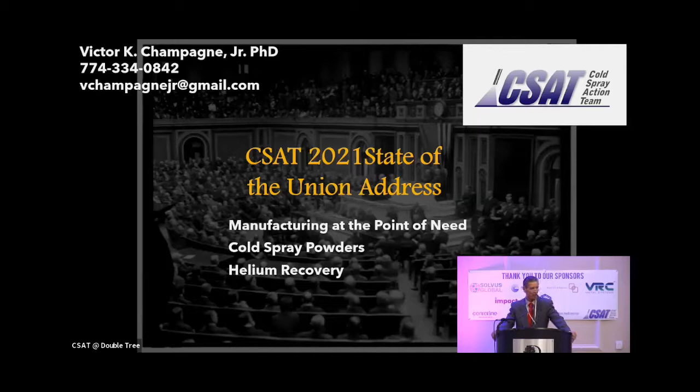Well, helium is a byproduct, so we're able to capture it in the United States, but it's still - you can view it as a finite commodity. It is expensive, 100 times more expensive than using nitrogen, but it's got big attributes, right? You get the highest velocities from using helium. So there are big efforts in trying to come up with helium-like properties using air and nitrogen, but there's helium recovery too, and I've got a few slides on that.

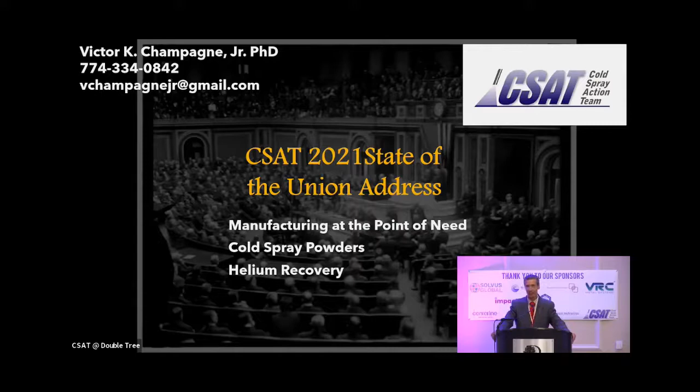So to jump right in - the Cold Spray ecosystem.

Creating that over 22 years. And I would say 90% of the people are tapped into that Cold Spray ecosystem that are sitting here today, either directly or indirectly. What is he talking about, ecosystem?

Ecosystem consists of numerous universities, national laboratories, industry players, Department of Defense, energy, other research laboratories - I still refer to it as United Technologies Research Center, so it's Raytheon Technologies Research Center. But lots of projects, programs that one year, that ecosystem sustained upwards of $120 million, okay?

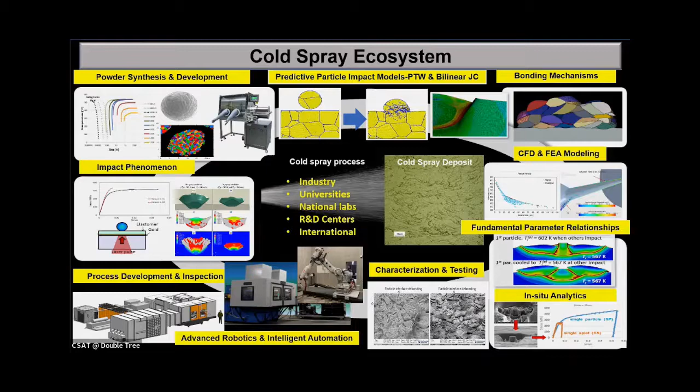And part of what you're here to do is to be networking, forming partnerships, future collaborations, taking what I say and a lot of these great speakers you're going to hear today and say, geez, wow, I didn't know you could do that. Or look at, geez, look at what they're doing here. We should be doing that. And then finding out the people to work with to make that happen.

I'm not going to go into these areas, you can read just as well as I can. But there's basic research opportunities, testing and qualification, certification, transition, implementation, development and sales of feedstock powders, of equipment, of additional hardware, software, accessories, support equipment, etc. That's the ecosystem, and it is not a closed system, it's an open system.

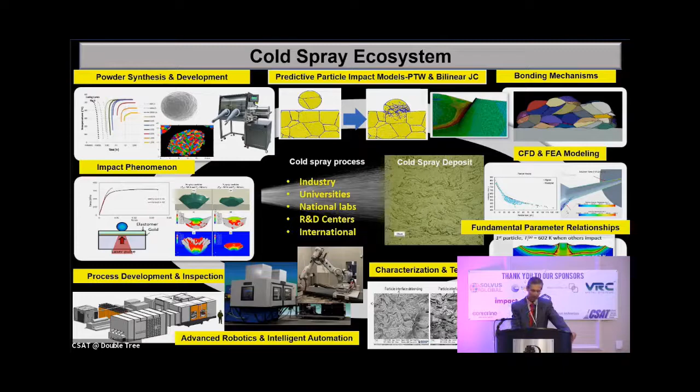We try to make it be as much open as we can. We know Cold Spray. I've developed personally with my team through the years, applications and transition into all these areas - oil and gas, automotive, especially aerospace, right? I mean, that's basically the first industry that I targeted. But there's others, including medical, antimicrobial coatings you hear.

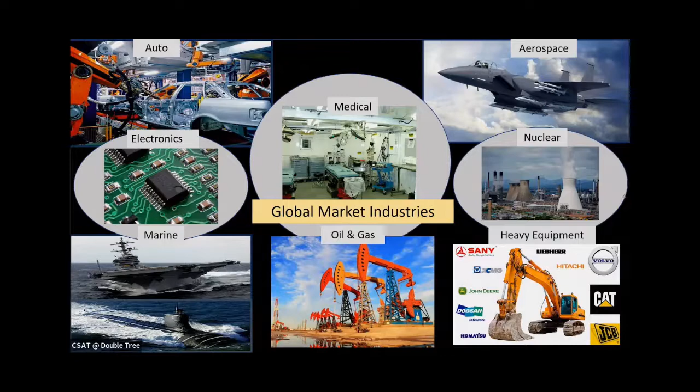And it's so funny because the work that I did with the team, geez, 2008 to 2010, published some papers, in like '12, '13, basically touting the benefits of antimicrobial coatings. So people are crawling out of the woodwork now. If they would have implemented stuff that I had said 10 years ago, we would have been much better off. So there's a lot of visionary statements that I make through the years, that other people make, presentations that you will hear today, and 5, 10 years from now, you'll be saying, geez, I heard that first at CSAT.

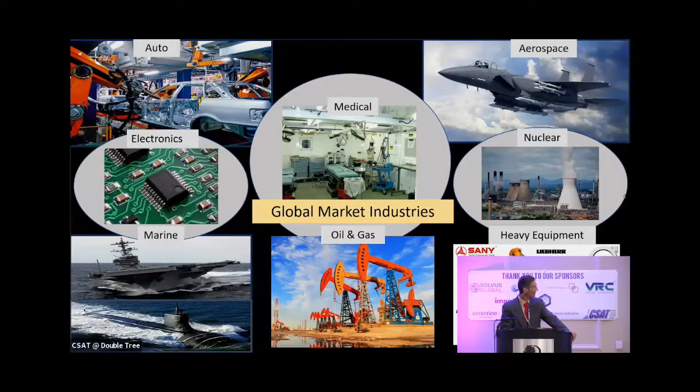And so with that, I'm going to throw up this slide. So part of what I've been doing is to substantiate some investments with folks that I work with, market studies. This just happened.

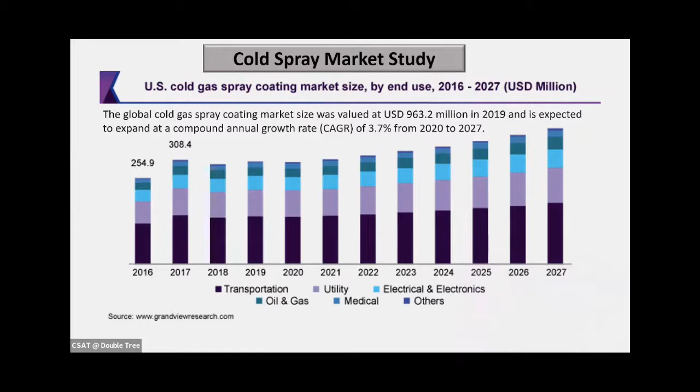You could pull this off the internet. All right, that's where I pulled it. But it shows the tremendous upward trend. And a lot of these areas, I'm looking at Aaron Nardi through the years that we've developed - we've developed and impacted a lot of these areas. So you see the significant rise.

Now, I think in dollars, we're still just shy of $1 billion, where thermal spray, I think Keith, are upwards of like $8 billion. And I firmly believe that we should be in upwards of that number. And with the advent of 3D printing, I think we should be surpassing that. I think that's what the future holds.

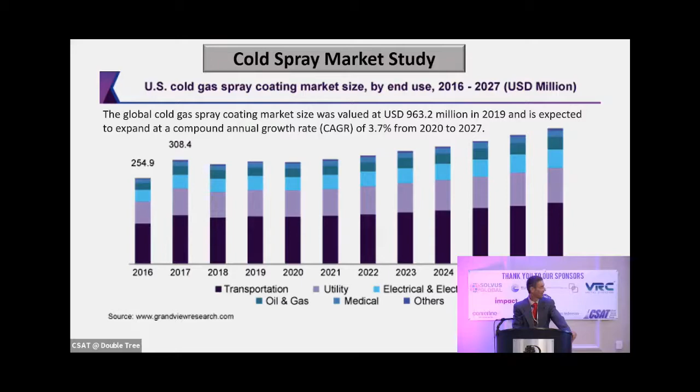And this is a directive coming from DoD on the benefits, the attributes, and the go-forward plan. We need more lethal systems powered by innovative designs, kind of a general statement. It increases materiel readiness, empowers warfighters to solve problems in the theater, right? We don't have to rely on a depot, we don't have to rely on a repair station in theater.

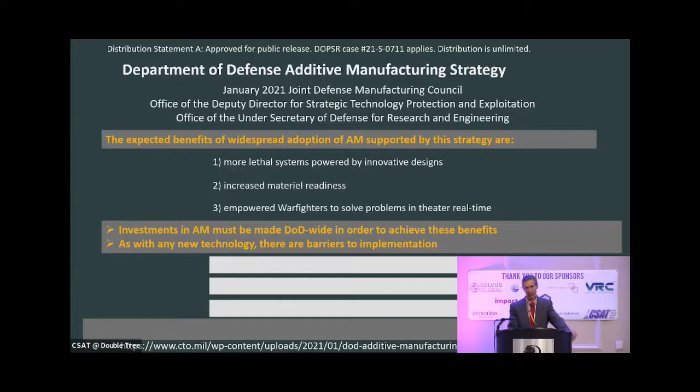But it depends on, hey, how far advanced are we? Are we mature enough? Level of expertise, training, certification. You can buy a system, doesn't mean you know how to use it, right? And then finally, data.

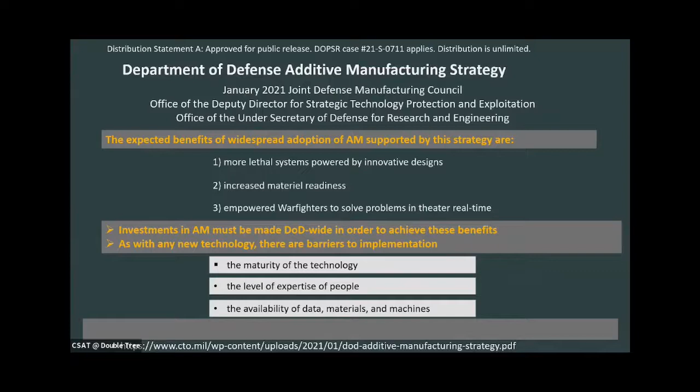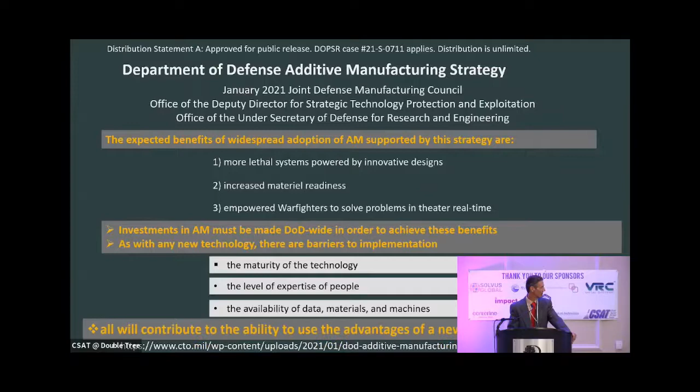When I first started the ESTCP program, which serves as the poster child for qualification of non-structural repair, is the one document right now that contains the most data on any one single material substrate combination - that's how I'll say it. And that's all going to contribute to how far we get.

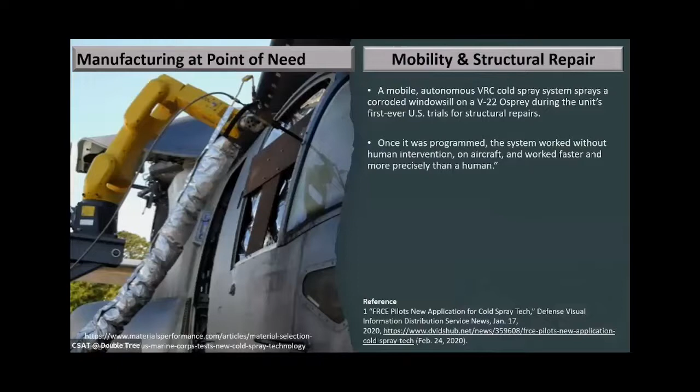All right, I'm going to show you a couple of 2-3 examples, highlights, again, over the last year or two. I wish Fred Lancaster were here, because I mean, this is where he could bathe in the limelight.

So this is a news press release on the VRC system, mobile system, repairing a windowsill area on the V-22. So it's basically a mobile system. You see, it's attached to a robot. It can be manipulated out in the theater, out on a tarmac, wherever you need.

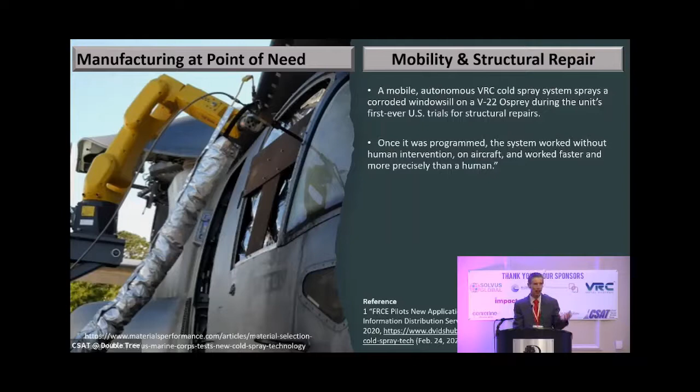And here's a quote from Fred: the future is with structural repair. And I'm going to go so far to say he's absolutely right, and go beyond that - structural repair and 3D printing.

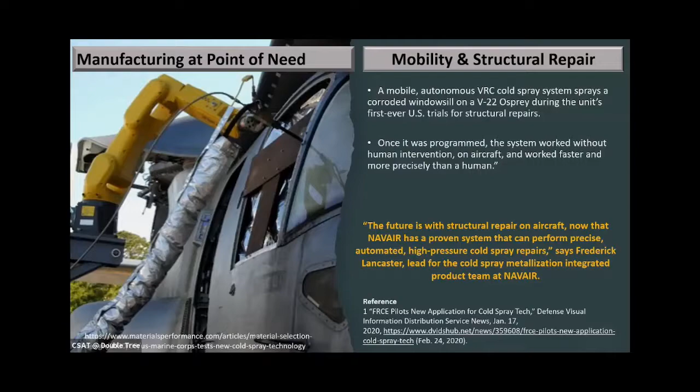I'm going to give you another example of a different system. This is amazing too.

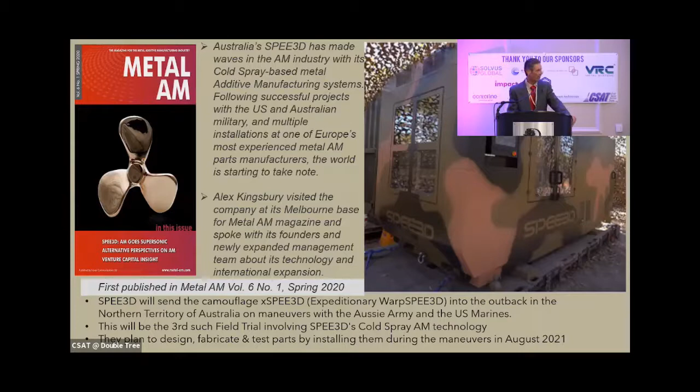I just heard that this August, the Aussies and the US Marines are going to be doing joint maneuvers out in Australia, out in the outback. They're going to be taking a number of these systems out there, and not only producing parts—they've done this 2 or 3 times together, I think this will be the 3rd time. Actually I heard about it, I'm looking at Aaron, because we had to do a tour for a general who basically said, hey, can you do this? I just came back from maneuvers with the Australians and they're doing this. So you see basically a SPEE3D unit, instead of that bright fire engine red, is camouflage, right? Because that wouldn't go over well in the theater. You'd be a target. But they're making parts, and not only that, they are going to be inserting and testing those parts in theater over, I think, a 2-week period. So that's pretty neat.

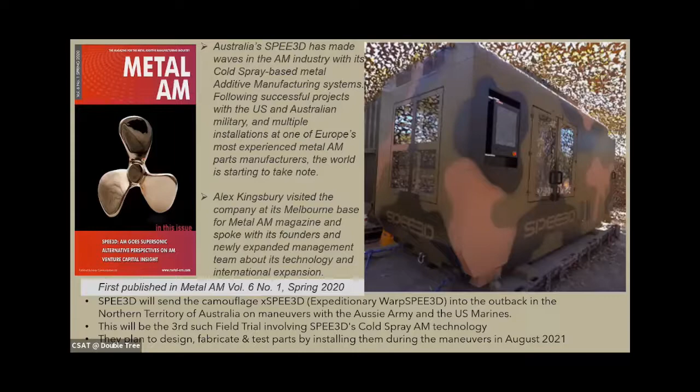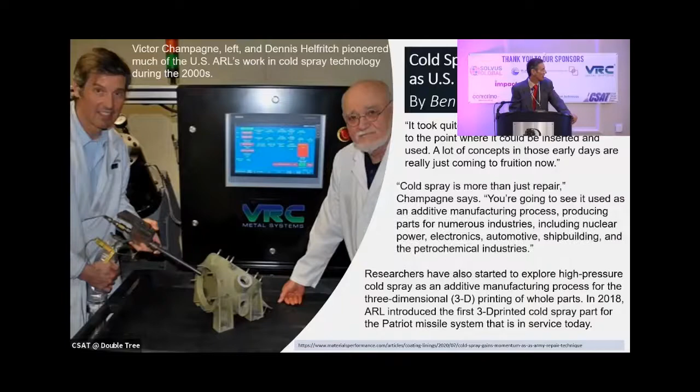All right, these 2 good-looking guys, right? This is over the last year. All right, and here's my quote—I've said this since day one. It's not just a coating technology, it's not just for repair. The future is going to be, and also in 3D printing.

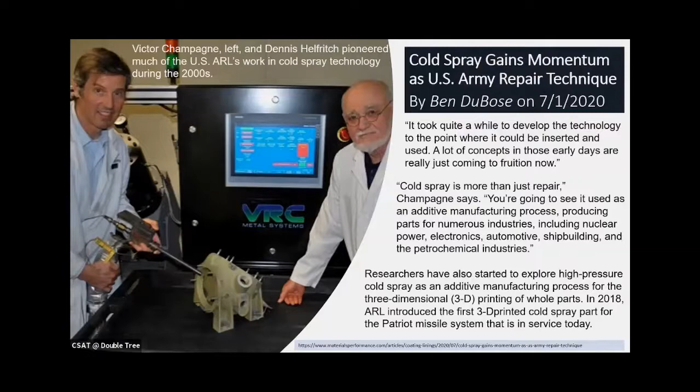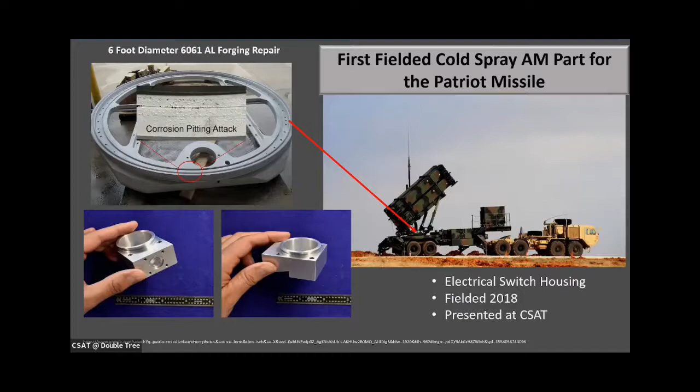So that was printed like last August, July. This thing has a delay. Here's a near net shaped part, was produced a couple years ago, 2018, introduced into the Patriot missile. The future of cold spray systems.

I just want to end with this too. At the end notes on the second day, I'm going to end and go into this in more detail. But what I see in the future perfect system—and I had said this when I was the keynote speaker at the 2007 International Cold Spray Conference, and the 2011—and I'm going to say it today in a different note: the future system, it's got to be flexible. What does he mean by that? And it's got to be adaptable.

Flexible, adaptable. I want that future system to be able to do high pressure, to be able to do low pressure, to be able to have software and hardware to do 3D printing. I want that system to be modular in concept, but at the same time be turnkey. I want that system to be able to fit through a manhole cover in a submarine, because of its modular concept, being able to be taken apart and put back together again. Or I want it in a production setting, or out in the middle of the desert, or anywhere else.

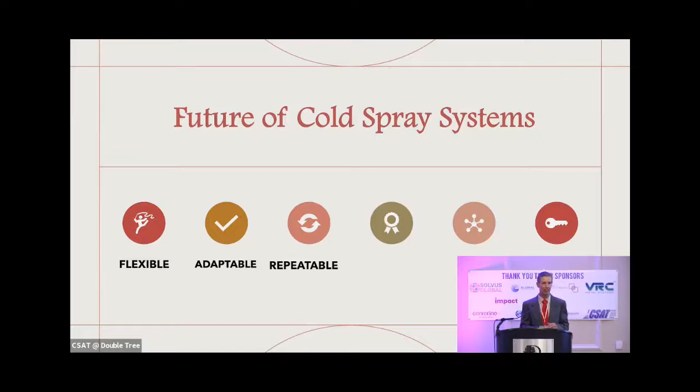I want it to be repeatable. That's not just me, all right? The whole additive manufacturing industry, it's got to be repeatable. You've got to get repeatable results. They've got to be reliable results too—am I hitting the requirements, the specifications? Got to be robust, all right? I don't want to take some laboratory system out in the middle of a desert and have it fall apart because dust infiltrated it, or take it out in Alaska and a pump freezes up because it's not made to withstand cold weather.

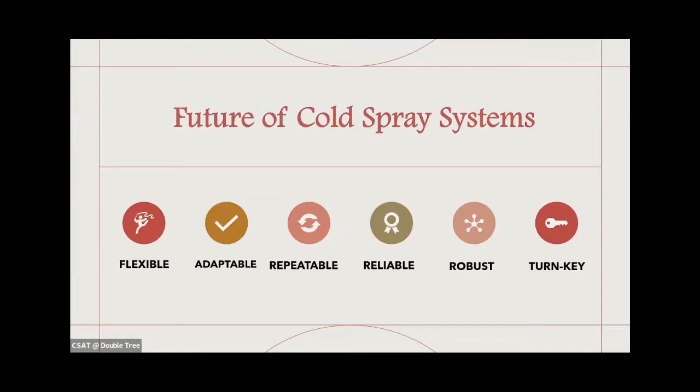And I want it turnkey. I don't want to be saying, you know, you got to buy this, you got to buy that—well, we don't do this. No, turnkey, okay.

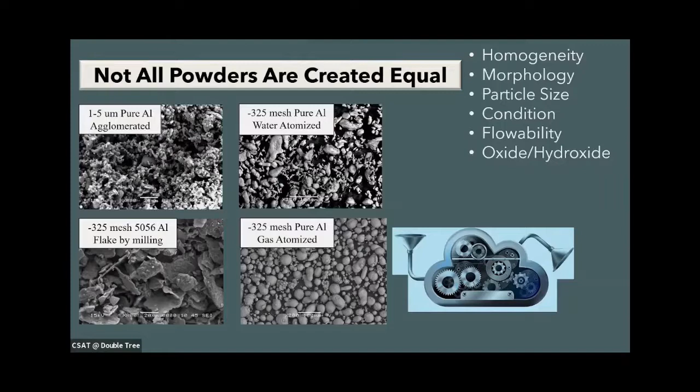Let me tell you a little story. Not all powders are created equal. I've got a lot to say and I've got to blow through these slides, but it's important. I don't want people using that argument against me by saying, oh look, you're going to buy special powders in order to use this system or that system. I don't want that—I want to be able to use off the shelf.

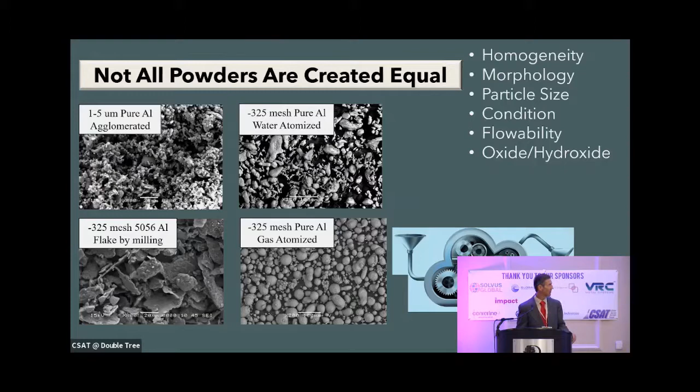Actually, I stole my own thunder, right? This thing has a delay, it's ticking me off. You have to actually press it a couple of times for it to do it once. But anyway—

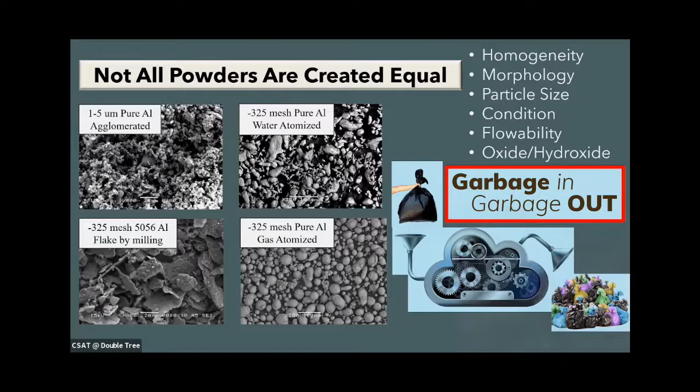This is aluminum powder, okay? So to the uneducated, I'm buying some aluminum powder, just give me the number and I'll call. You could get any one of these for aluminum powder. They all meet the chemistry, they'll all meet the past requirements for aluminum powder. I wouldn't meet it now because we've got flowability worked into the specification and other things, so you couldn't get all four of these. But a lot of people, they don't know the difference.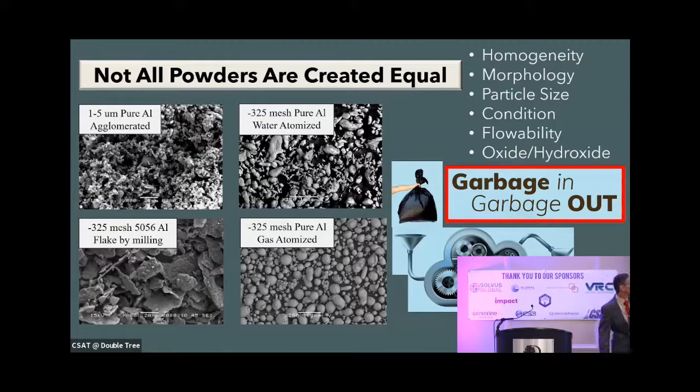Did a little experiment. A guy did his PhD thesis on this that I know. What he did is he took as-received powder and exposed it to humidity.

Oh, they can't hear me online? Okay, alright, so you got to have one of these walking things. I got a little animated here. You got to chain me to this damn thing so I can't see the slide. I wonder if this helps. No, that's worse.

So anyway, we wanted to expose it to humidity, alright? And I fought with people from DOD who told me that aluminum powder doesn't further oxidize, that once you get it in a gas atomized condition, it's not going to grow any more oxide. That's a bunch of crap, alright?

As a matter of fact, you know what they use aluminum powder for? A desiccant. What's a desiccant? Something you use to absorb water. How does it absorb water? It's a chemical reaction that takes place, and you form hydroxides. Picture yourself at Corpus Christi Army Depot in the summer.

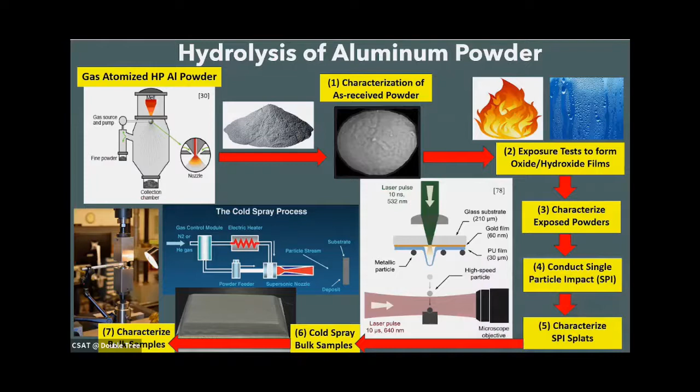You got a bucket of powder that you buy. They don't typically buy powder just for one spray trial or one spray run - no, they'll buy a bucket. They'll open that bucket up, put in what they need, and then leave the bucket open. If you're lucky, they may close it. Doesn't matter - in the experiment, we opened up the bucket, closed it, opened it up to simulate a couple, 2-3 weeks of doing that. Then we characterized those exposed powders and compared it to a baseline.

Then we did single particle impact studies to see how it would impact the critical velocity required to have the particles stick and consolidate. And then we made blocks of material and did all sorts of mechanical tests on it - we even did conductivity, hardness, UTS.

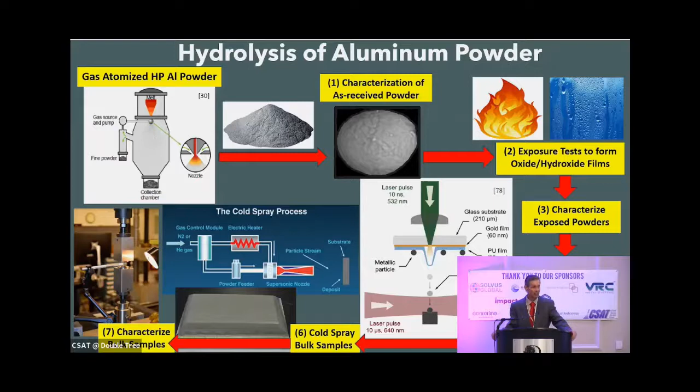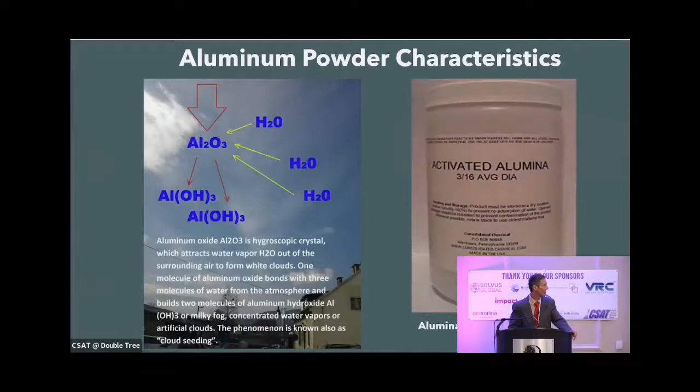And guess what? I've already said this, but I'm going to point it out again - for those that don't know, aluminum powder is a desiccant. So for people that say, well, what test did you run - you can read just as well as I did. We did everything under the sun to characterize the oxides, the hydroxides before and after. This is the most in-depth study that I've ever done, I bet anybody's ever done, that I've ever read, by far.

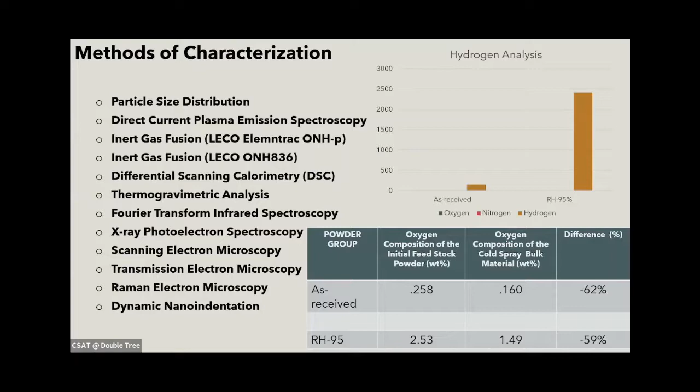Look what happened to hydrogen, look what happened to oxygen, comparing the as-received to the group that was exposed to 95% humidity. It went through the roof. You don't get hydrogen from the formation of an oxide - you get it from the formation of a hydroxide. So it hydrolyzed, that powder hydrolyzed.

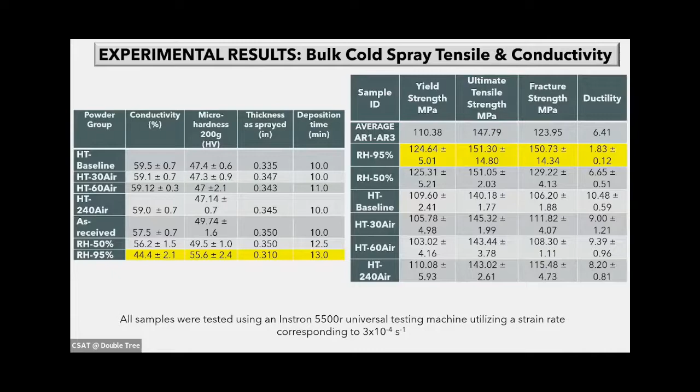I'm not going to point out all these different samples. We did experiments in heat treating the powders, and you see the differences in ductility. But the point I'm trying to make is: you open a bucket of powder, it gets exposed to humidity, it's going in the crapper pretty quick. And we've experienced that firsthand before we knew this.

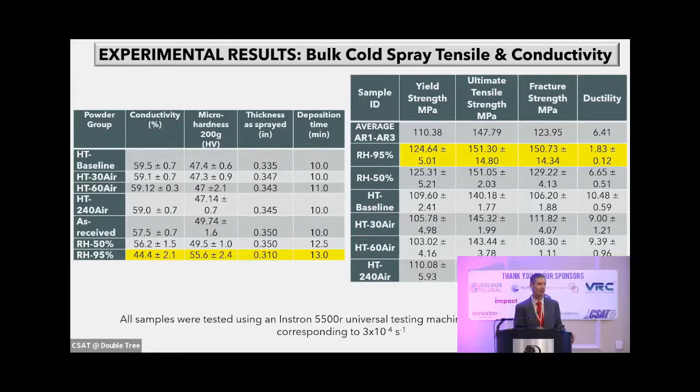We got properties in the as-received powder that were great. We sprayed it a week later and it was garbage. Whether you're doing bubblegum repairs, it doesn't matter - you're doing structural work, you're doing 3D printed parts. If you don't have specialized feedstock powders, you're asking for trouble.

Differences in fractography - I don't want to be just a talking head about programmatic stuff, I love the technical stuff. Ductile dimpled fracture in the as-received powder, versus intergranular brittle fracture in the high humidity case.

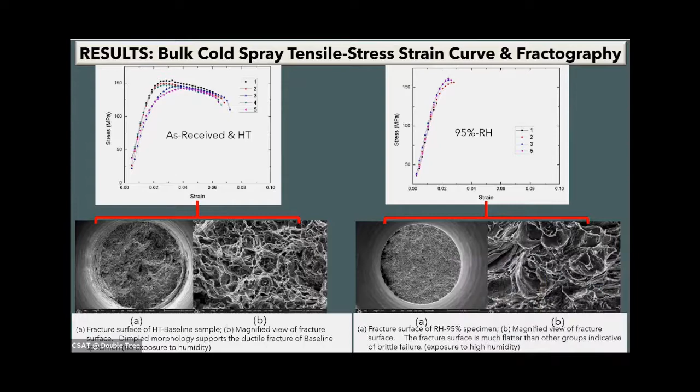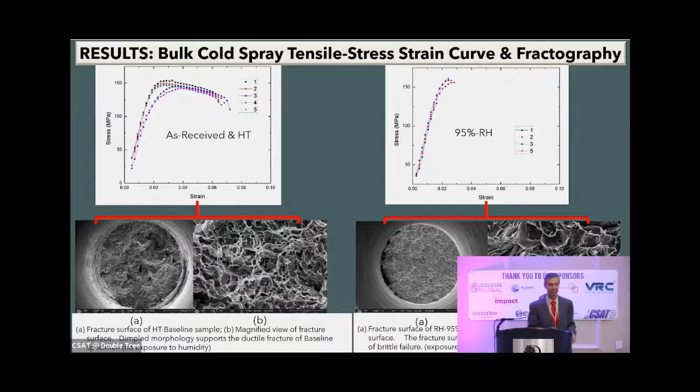So what did that mean? You got an oxide, hydroxide formed on the outside of that particle, all bombarded, formed a big block of material with a bunch of oxide in there. You pull it, it's got no ductility whatsoever, and it fractures in a brittle fashion. You want that on an aircraft? I sure as hell don't.

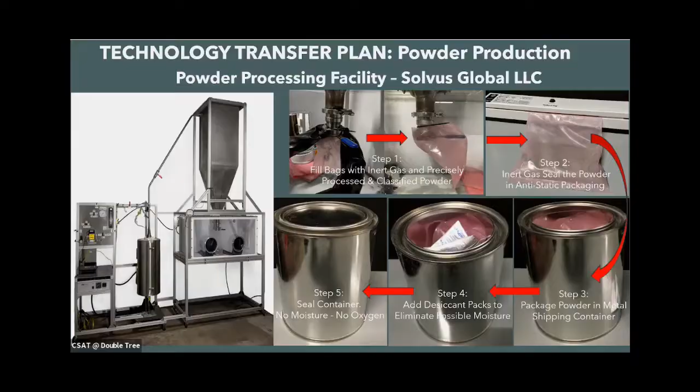This is the process that we use now. We process the powder, we have preferred geometry, and I'm not going to go into all of the different QA tests that we do, but it's flowability, it's chemistry, it's geometry, it's particle size distribution, and it's packed density.

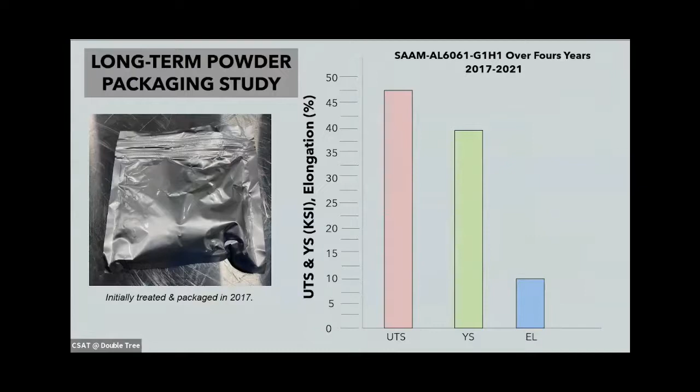This is a fascinating study, and this was part of the PhD thesis. I had data which extended to a year at the time. Now we have data that extends out since 2017 - I just did some averages and made that chart. But basically, after 4 years... think of a can of tuna.

Whether you eat it on day one or you eat it 3 or 4 years from now, you're not going to get botulism and die.

The cool thing about this is 4 years later, in that inert package, I can use the powder. So if I'm on an aircraft carrier out in the middle of the Pacific and it's humid as hell, that powder's protected in its own little cushy environment saying, I don't feel the sea mist, I'm not hydrolyzing, I'm having a great time, I'm nice and dry.

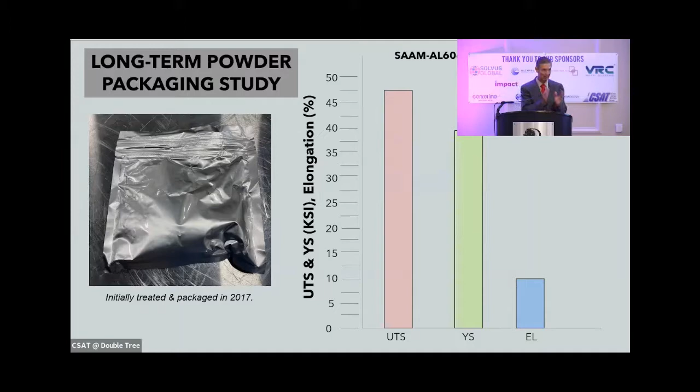And if you get inventive, which we have, you can develop a little nipple on this thing with a female and male connector to your powder feeder. So even when you put it in a powder feeder, you don't have to expose it for those few seconds or minutes, if you want to keep that level of control.

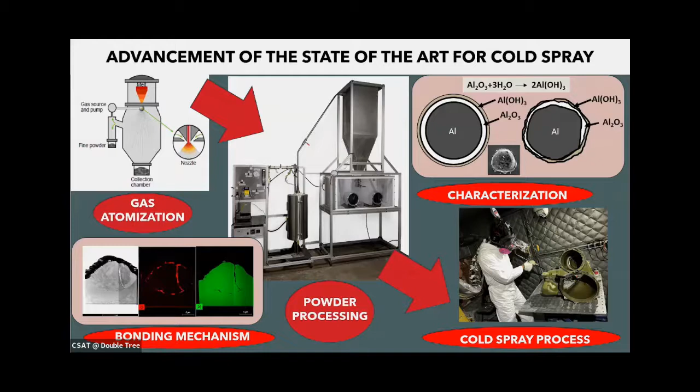I made a little cartoon. So don't think your aluminum powder has a nice little candy coating like an M&M of aluminum oxide on it when it gets hydrolyzed when you open it up at CSAT. No, it will hydrolyze immediately.

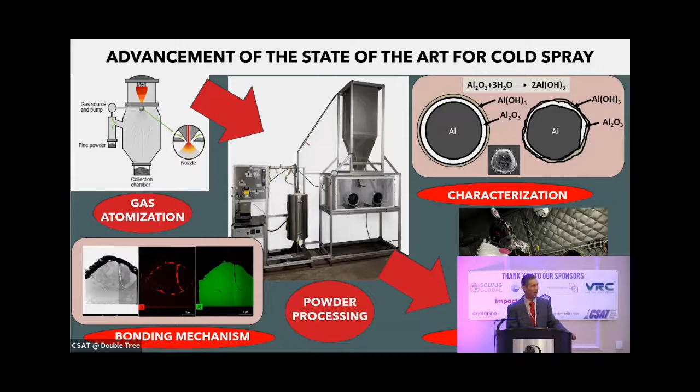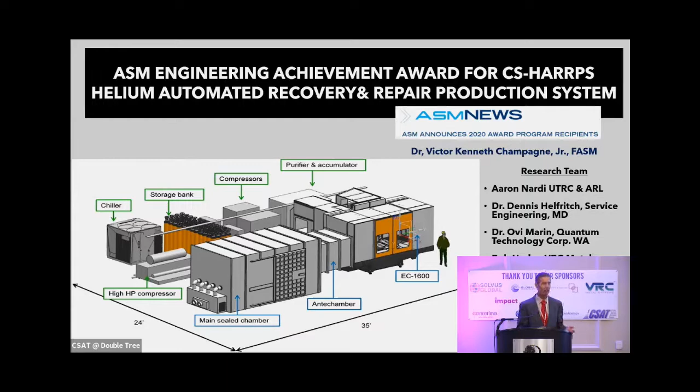I don't have time to explain the entire system. You can see me afterwards, we can discuss it afterwards. But it becomes efficient, I'll say between 20, 30, maybe 40 minutes, depending on the flow rate. So if you've got a 5-minute spray, a 10-minute spray, you're not using this system. But anything else, you do use that system. It's recovering anywhere between 94, 95%, when it's fully in operation and you've got long sprays.

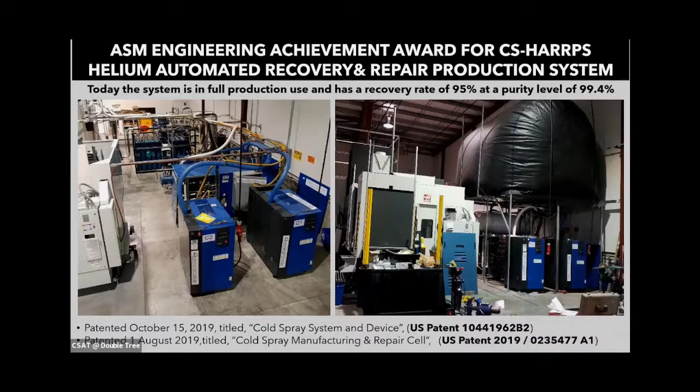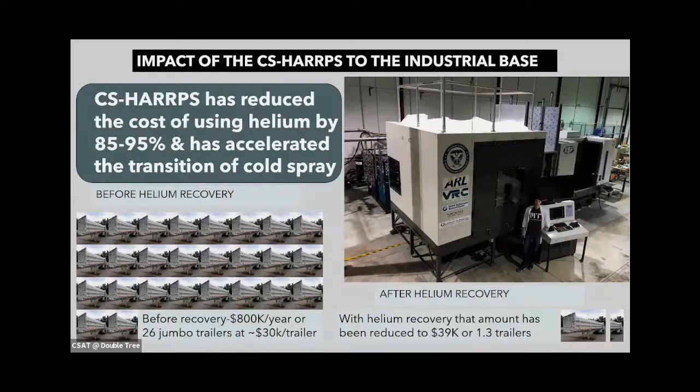That's kind of what it looks like. There's a little cartoon that I threw up, which is God's honest truth. When I was at ARL, we were spending 800 grand a year - that's how many trailers we would have. With the helium recovery, if you were to use it, you'd see those 26 jumbo trailers reduced to like 1.3.

But it talks from a practical perspective. So a guy in a depot, this would be beneficial to, but then also an academic would be beneficial, because it's got the theoretical explanation, but the backbone of it is practicality. It's almost like a how-to book. You go to Home Depot, you want to put in your own sink, right? Your wife's on your case to put in your own sink, you don't want to hire a plumber, so you go out, and that's what this is - from setting up a system to qualifying a process, to transition, to implementation, to specifications and standards, and developing your own processes, to feedstock powders, to material properties, and what tests should you be conducting, what inspection criteria should I be using, the whole 9 yards.